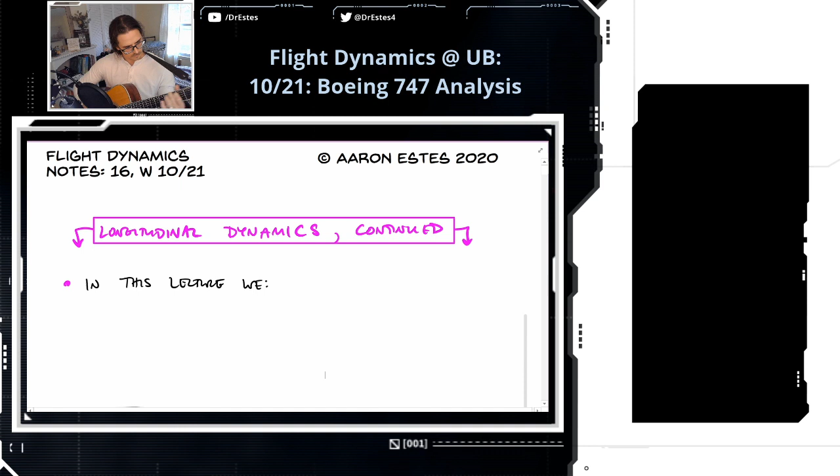Just what I needed to go with my lunch. Nice, this little thing I'm trying to learn how to play, it's from the game Chrono Cross, the sequel to Chrono Trigger. I think it's amazing how some of the most beautiful music is out of video games.

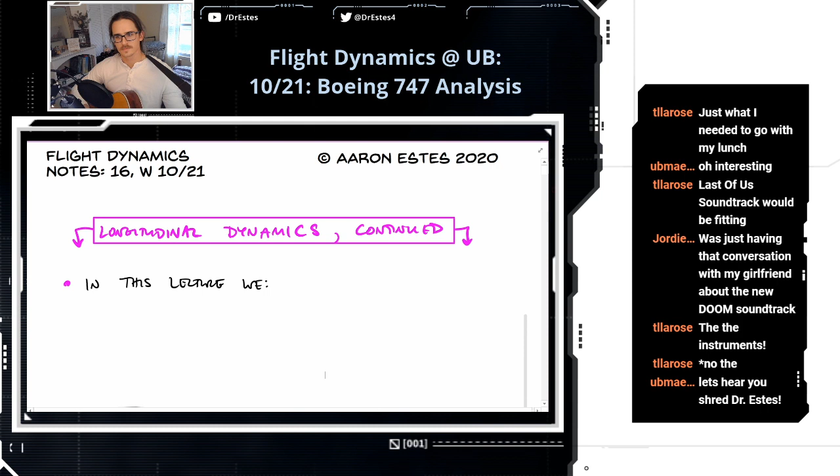Oh my goodness, am I a fan of Kirby? I'm familiar with Kirby, but I wouldn't say I'm a huge fan.

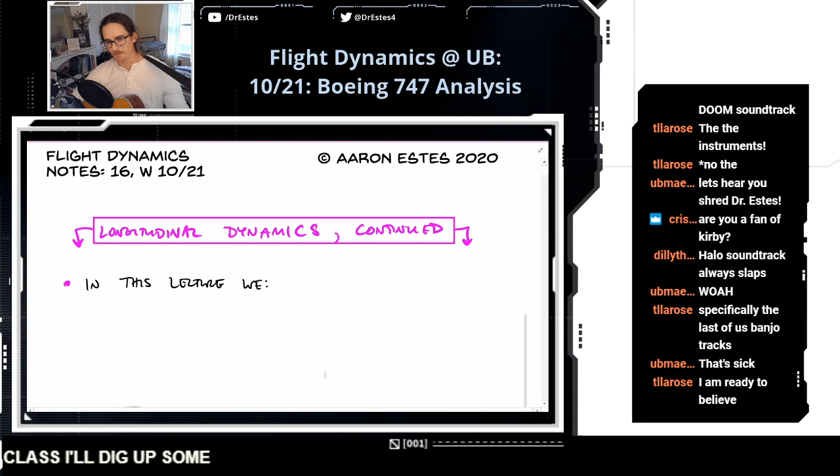Dude, I used to play a little death metal. If you remind me at the end of class, I'll play some for you. I'll bring up an old recording. You won't believe it. You'll be like, dude, I didn't know you shredded so hard. Oh, that makes me want to listen to The Last of Us, I'm going to look that up after class. Thank you for letting me know about that. Any soundtrack with some banjo, I'm game. If you guys remind me at the end of class, I'll dig up some tracks from back in the day, from the depths of the pit. It's just gonna melt your face.

Oh, that's funny. My brother Nathan, he would do some of the vocals, so I would do vocals with Nathan. And if you're familiar with death metal, it's just like guttural growling. It's just gonna melt your face. Was that how I delivered it? Yeah, it's legal to melt the face. It's definitely okay.

Are you guys ready to get started? I think this will be kind of fun today because we're going to dig into the parameters for a 747. In the second example we do, that's what we're going to do.

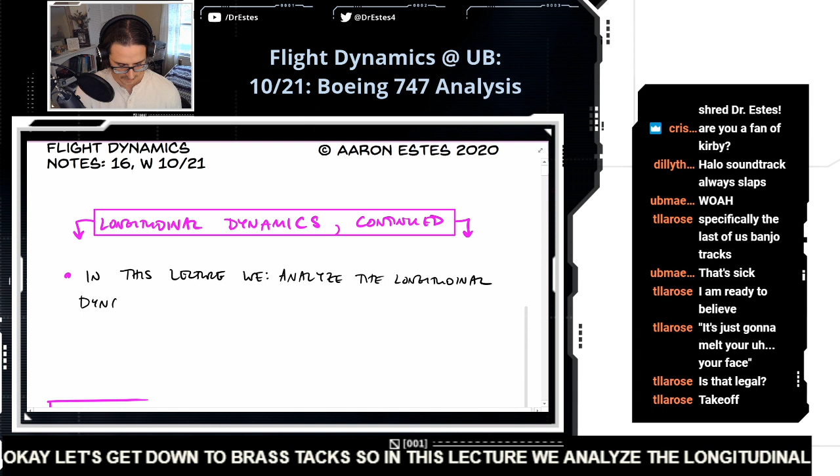Let's get down to brass tacks. So in this lecture, we analyze the longitudinal dynamics of some real aircraft. We're going to dig into some numbers. We will introduce the phugoid and short period mode. These are the two modes of longitudinal dynamics, and we'll introduce those a little bit, tell you what they are.

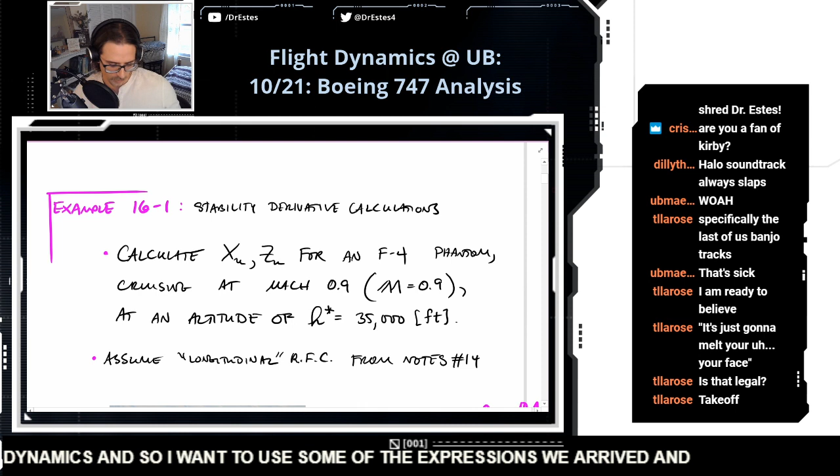So let's get into it. We're just going right into an example. Last class we talked about stability derivatives, specifically stability derivatives for longitudinal dynamics. So I want to use some of the expressions we derived and get stability derivatives for an F4 Phantom. We're going to get these two stability derivatives in this example.

This is an F4 Phantom right here. I think a lot of countries use this aircraft in their Air Force, it's not just limited to the States. I did a quick little Wikipedia scan and it was like, holy cow, a lot of people - this is a popular aircraft. So that's what we're looking at here.

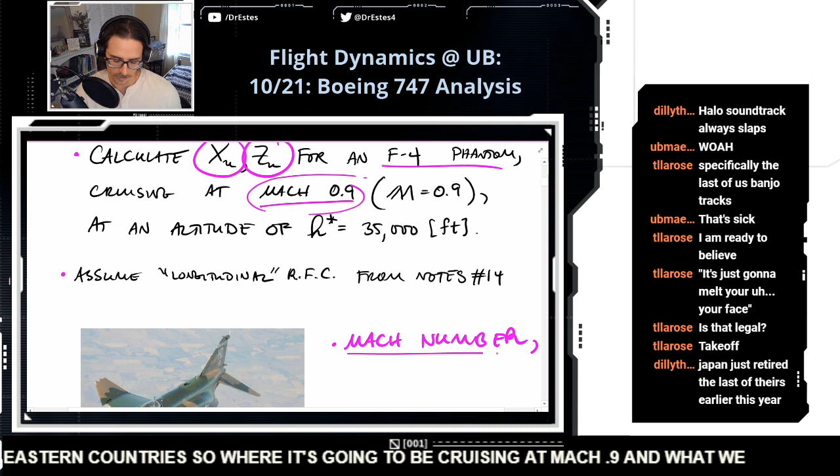Let's assume that it's cruising at Mach 0.9. Japan just retired the last of theirs earlier this year, okay cool, so maybe they're being phased out. But yeah, from the US, Japan, there were some Middle Eastern countries. So it's going to be cruising at Mach 0.9, and we haven't talked about the Mach number yet, so we'll introduce that. We're at a height of 35,000 feet, which is a pretty common cruising altitude.

Now, today we're going to be assuming the longitudinal reference flight condition, maybe like the standard. In this reference flight condition, the one we've been using the previous couple notes, it's just flying straight with constant velocity at some constant altitude. So the aircraft isn't turning or anything, it's just, boom, I'm going straight. That's the reference flight condition. So nothing too complex about that.

So what does it mean to be flying Mach 0.9? I'm going to use this scripty kind of M for the Mach number to distinguish it from the other capital M that we use, which is the pitching moment. So this is the way we'll tell them apart. But the Mach number is as simple as this: it's the velocity of the aircraft divided by the speed of sound. So if the Mach number is 1, that means that you are traveling at the speed of sound. We'll use lowercase a.

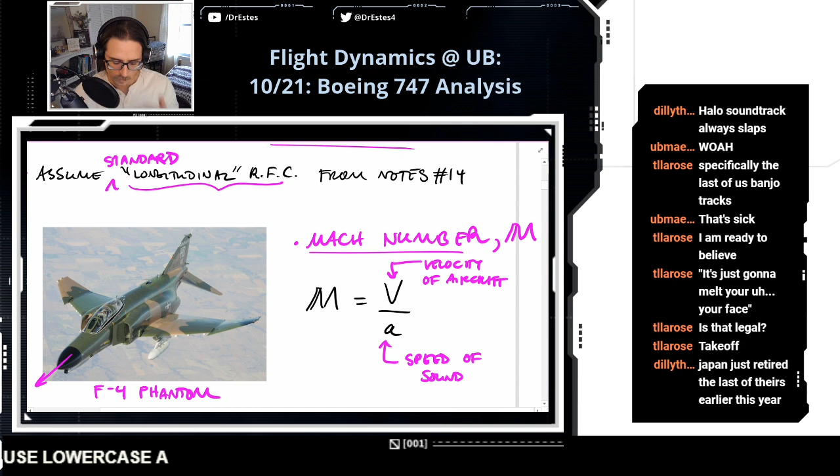Now, the speed of sound changes with altitude as well.

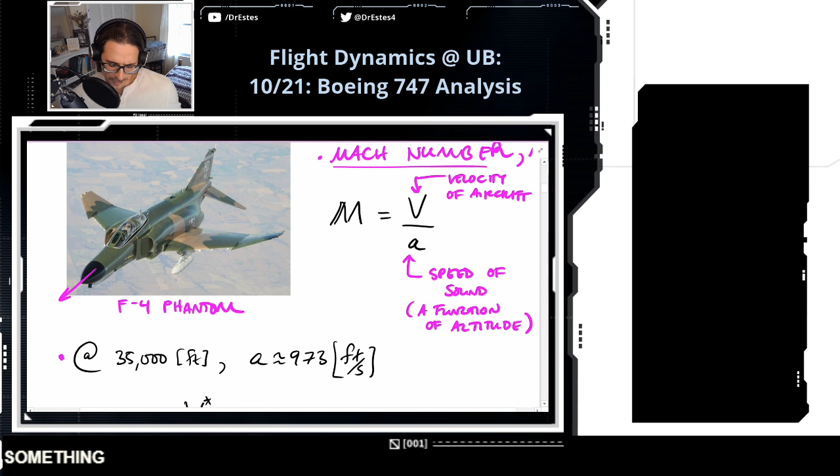Isn't there a Coldplay song about that? Something at the speed of sound. Get to the other side. I think that's exactly it, what I just said.

Okay, so at 35,000 feet, the speed of sound is... it rang a bell, yeah it probably sounds exactly like that if you pull up the album. So we're at 973 feet per second.

So our velocity, if we're going Mach, I already forgot what it was, Mach 0.9. We can solve for the velocity from this expression. It's going to be Mach number times the speed of sound, that's going to be 0.9 times 973 feet per second.

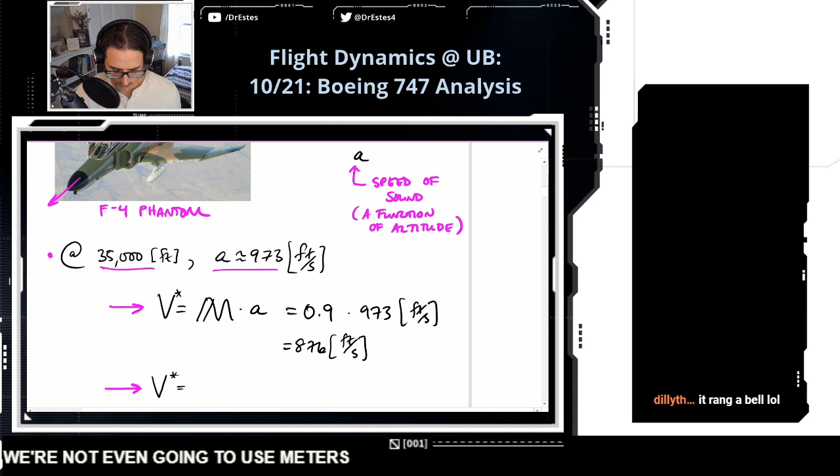We're using English units today, we're not even going to use meters. I think English units are pretty popular in aircraft dynamics, fortunately or unfortunately depending on how you look at it. I kind of wish everything was metric. Okay, so our velocity is 876 feet per second. Freedom units, that's right, we've got an election coming up, so we should just really ring the bell of freedom and use these English units.

At this flight condition, our side velocity is 0. We don't have any angle of attack, we're just flying totally level. So this velocity is all going to be in the U direction. In other words, we know that the body X basis vector points out the nose of the aircraft, so all the velocity is going to be in that direction, we don't have any side velocity. So U star, we're going to say it's 876 feet per second.

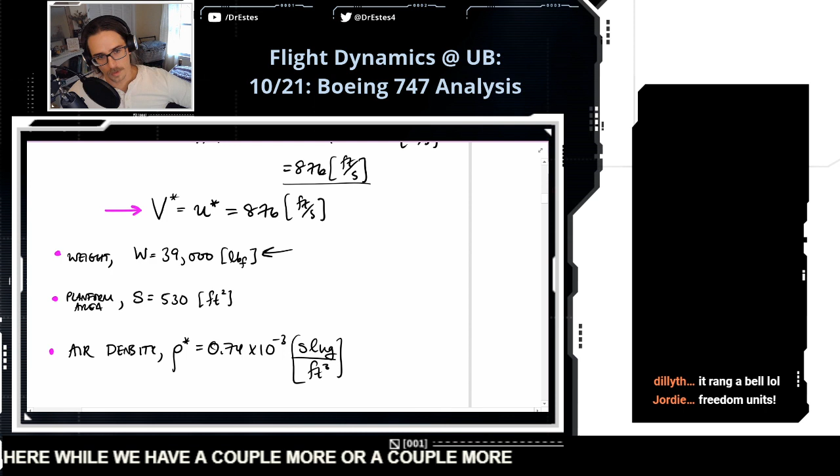Let's get the mass here. Well, we have a couple more parameters here. So this aircraft weighs 39,000 pounds. The planform area is 530 square feet.

Yes, alpha is going to be 0. And because we're at constant altitude, our angle of attack alpha is going to be 0. At constant altitude, this is also equal to our pitch angle, so we're going to be assuming both of these things.

Let's assume that. Okay, 530 feet squared, which, I don't know, I was looking at this and I was kind of surprised that the area projected here is 530 feet squared, but that's the correct figure, I double checked it. It just, I don't know, it almost seems like too much.

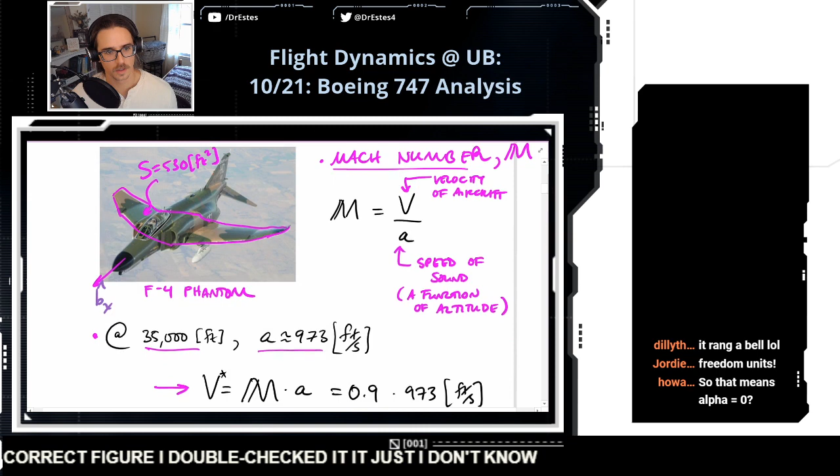And the air density at this altitude is 0.74 times 10 to the minus 3 slug per cubic foot. We're doing English units today, and we're going to take a second to talk about what a slug is. But we'll keep going. Well, look how tiny the person inside is for scale.

Let's see, oh actually that's a good point. I thought this whole thing was the person, but if you look really carefully, their head is just that, so they're pretty small in there. The later ones were two-seaters as well.

Schrechtenwald says, wait, doesn't alpha have to be greater than 0 to overcome the weight? Now, you're right, and I was thinking about this a little bit the other day, but this alpha equals 0 is just our... how do I say that? Well, okay, it's our linearization point. Actually, no, that's not a good argument either.

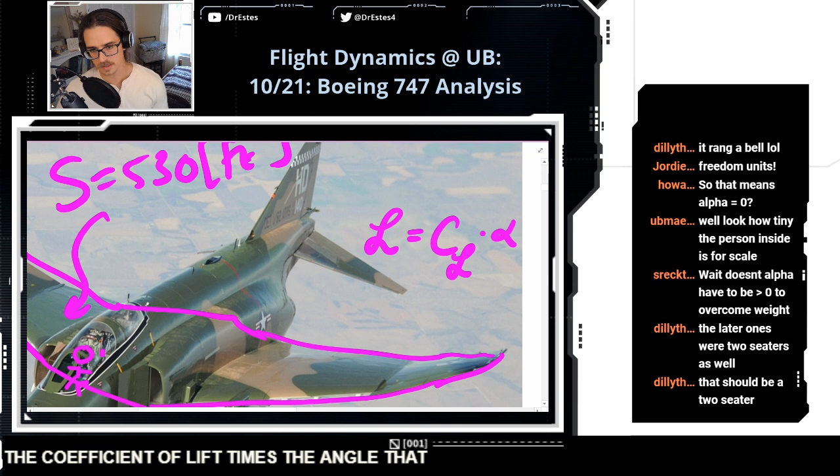I see what you're saying, because lift has to counteract the weight, and we can take the coefficient of lift times the angle of attack, that's like a standard linear representation of the lift force. And so you're saying if alpha is 0, don't some airfoils generate lift even at alpha equals 0? Non-symmetric and/or inclined airfoils.

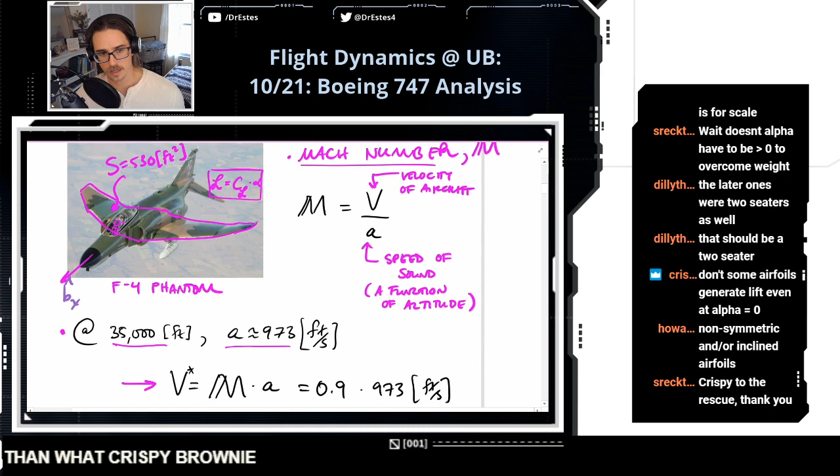Okay, so the purpose of this example is to calculate this stability derivative for this real aircraft, just to put some numbers to it. And last time we derived this expression, so let's put it to work.

This Q is the dynamic pressure, which is 1/2 times the air density times the velocity squared, but because we just have that longitudinal component, it's just U. All right, let's just plug in some numbers. 1/2, okay this is the air density, times 10 to the minus 3 slug per cubic foot, and then we're multiplying this by our velocity.

And if you multiply that all out, you get 283 slugs times 1 over feet times second squared. And we're going to come back to this in a second because I want to simplify this a little more.

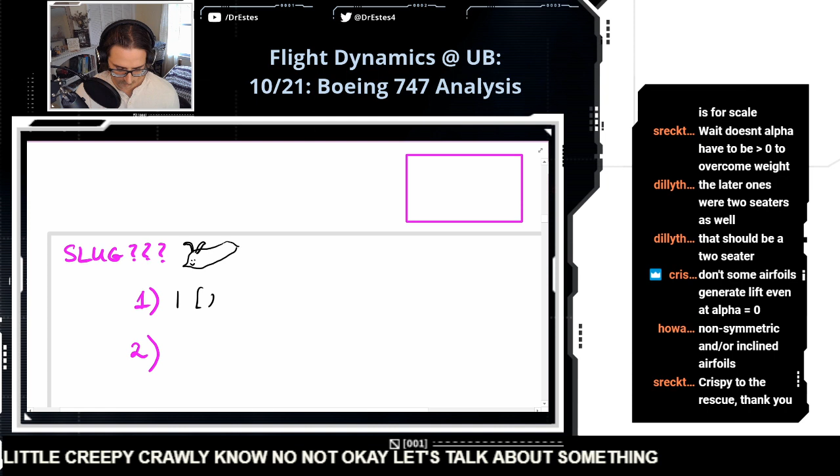Okay, let's talk about some English units here. 1 pound force is equal to 1 pound mass times 32.2 feet per second squared, which is gravitational acceleration in English units. I know we're used to 9.81 meters per second squared, but you could also do it in feet per second squared. Let's write another expression for the pound, but this one's going to involve slugs. It's equal to 1 slug times 1 foot per second squared.

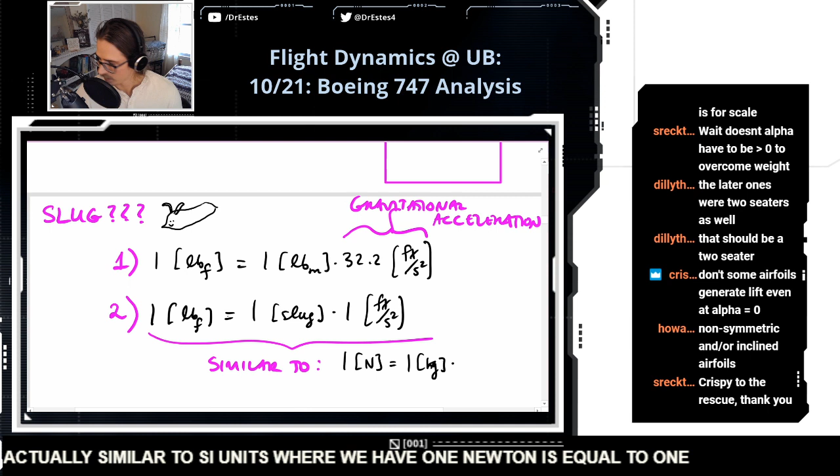So why do we even have the slug? I wanted to bracket this whole thing - this is actually similar to SI units, where 1 Newton is equal to 1 kilogram times 1 meter per second squared. So this pound force being equal to 1 slug times 1 foot per second squared is kind of analogous. Now, if you combine 1 and 2, this gives you the relationship between a slug and a pound mass.

So 1 slug is 32.2 pound mass. But what I want to use up above, if you take the second equation, you can say that 1 slug is 1 pound force divided by 1 foot per second squared. So let's use this up here.

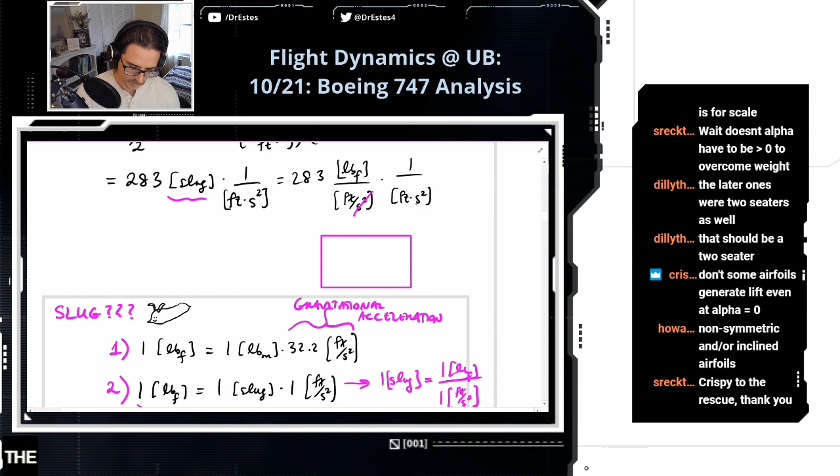So this is 283 pounds, and these second squares are going to cancel. So you're going to get 283 pounds per square foot.

Is psi in pound force? Wait, psi is the heading angle - or wait, sorry, I'm thinking of road vehicle dynamics. PSI? Oh, okay, gotcha. PSI should be pound force. Pound force, yeah, you're right. So many variables flying around. Okay.

Let's get the mass of this aircraft in slugs.

Interesting, I've been wrong all my life. Hey, but now you've seen the light. Wait, what did you think? Did you think it was - what units did you think it was in? Now I'm curious. Oh, pound mass. No, PSI, because pressure is a force over an area, so you got to do pound force. Okay. Watch, I'll be wrong. I don't think so.

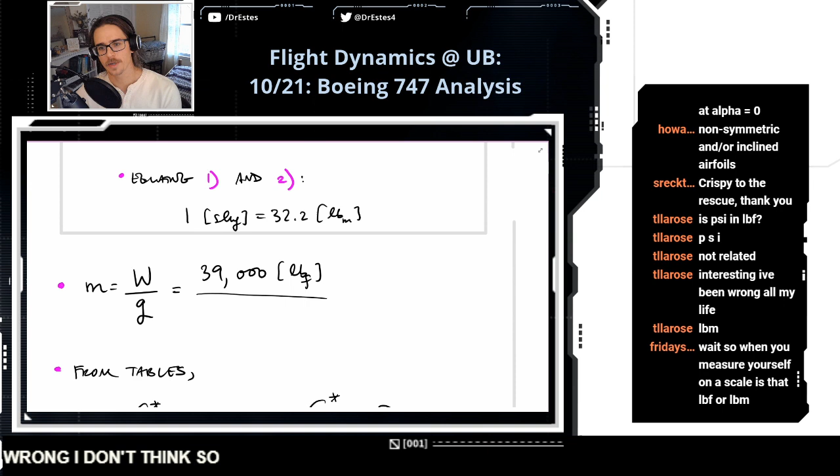Wait, so when you measure yourself on a scale, is that pound force or pound mass? That's pound force. I know it's tricky, but yeah, when you read on the scale, that's going to be giving you pound force, which is also equal to slugs. So you could say I weigh 180 slugs, because 1 pound force is 1 slug times foot per second squared. So I can lose weight by changing the units. Yes, you can. It's the easiest way to lose weight.

Okay, we got to divide by 32.2 feet per second squared, and this is going to give us 1,200 slugs.

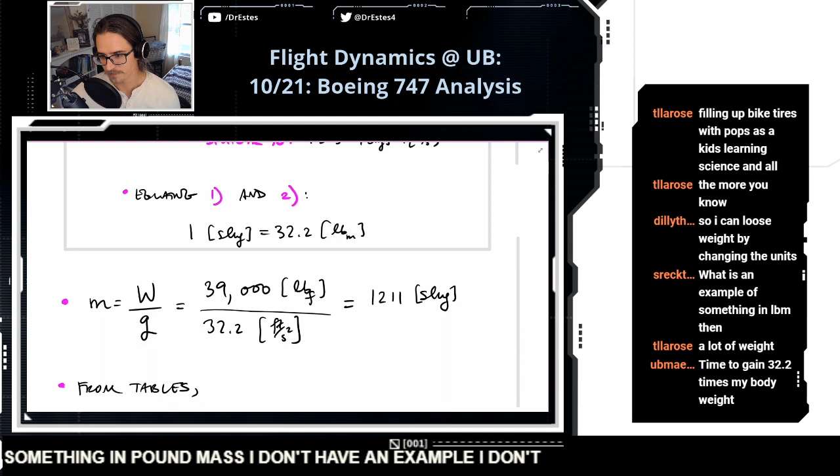Okay, so let's get back to this stability derivative here. We have this expression. Now these coefficients, the coefficient of drag and the partial derivative of drag with respect to your airspeed, these you find in tables. So eventually for flight dynamics, a lot of stuff is tabulated and we're just going to be looking stuff up. In fact, that's what we're going to do with the Boeing in the next example.

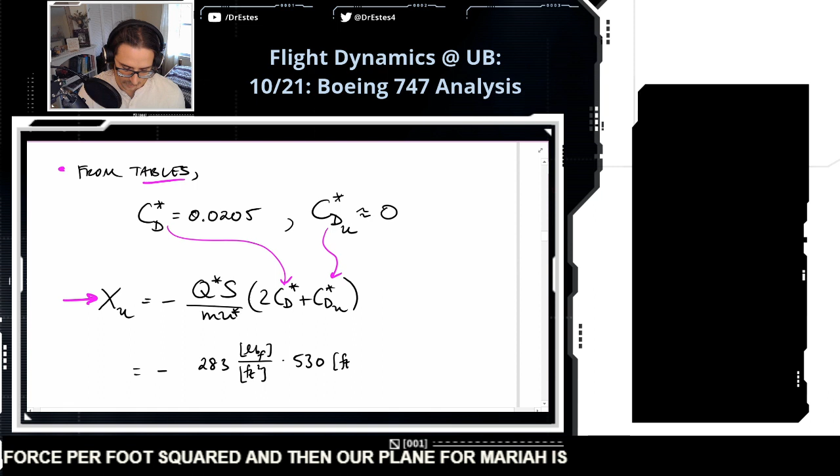Okay, so let's just plug some stuff in. 283 - so I'm putting in the dynamic pressure, pound force per foot squared. And then our planform area is 530 square feet. We're going to divide by our mass, which was 1,200 slugs. And then we're multiplying that by our velocity, 876 feet per second. And then we're multiplying by these coefficients over here, so that's just going to be 2 times our coefficient of drag.

And if you multiply all this out, you get minus 0.0058 1 over slug pound force.

And I wonder where the name slug came from.

Okay, this pound force over foot per second. This is slug times seconds to the minus 1. So that would allow me to cancel this slug here. Cancel out that slug. And then we're going to have seconds to the minus 1.

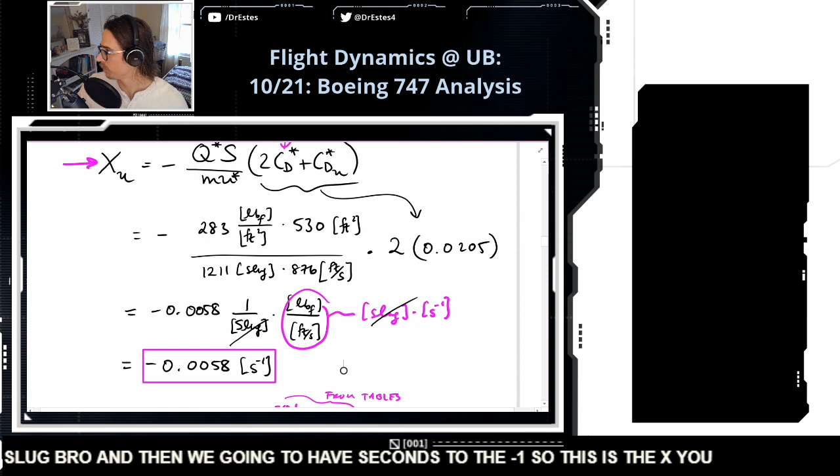So this is the XU stability derivative for an F4 Phantom, in case you were ever curious.

Now this other stability derivative that we wanted to get, Z sub U, this expression we didn't derive directly, but you can also find this expression in a table. This is from the Nelson textbook, and I think I put a portion of this table in our last set of notes. But this stability derivative works out the same way, you just plug in everything. And we would get minus 0.0283 seconds to the minus 1.

I was trying to fly one the other day, but the XU light kept coming on. I think you're making that up. Okay.

Guys, let's talk about a Boeing.

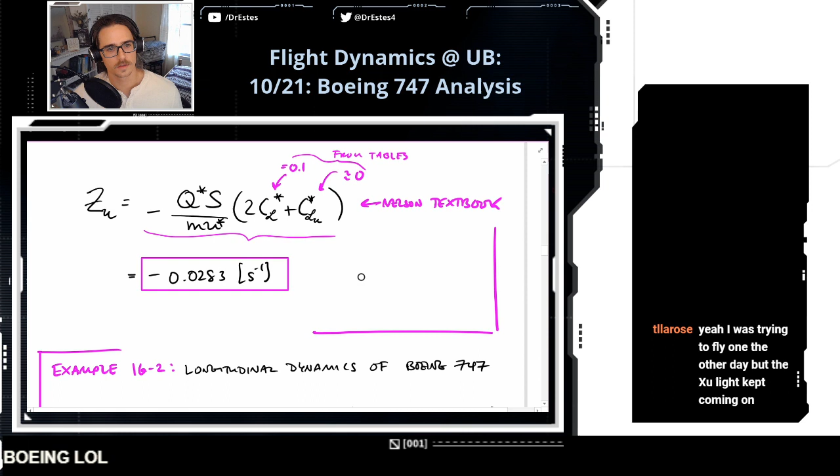And just a reminder, where do these stability derivatives go? Like, what's the point? If I have this number, what do I do with it? I'm going to scroll ahead a little bit here because I want to remind you of something.

We have these longitudinal perturbation dynamics that we derived. So this state space model describes the dynamics of an aircraft about this level longitudinal flying condition, and you see the stability derivatives get plugged into this matrix. And that's going to affect the dynamics. We're going to dissect that in detail for the 747. But if you're wondering, okay, we got this number, what do I do with it? Well, you're going to plug it into this matrix and then proceed from there.

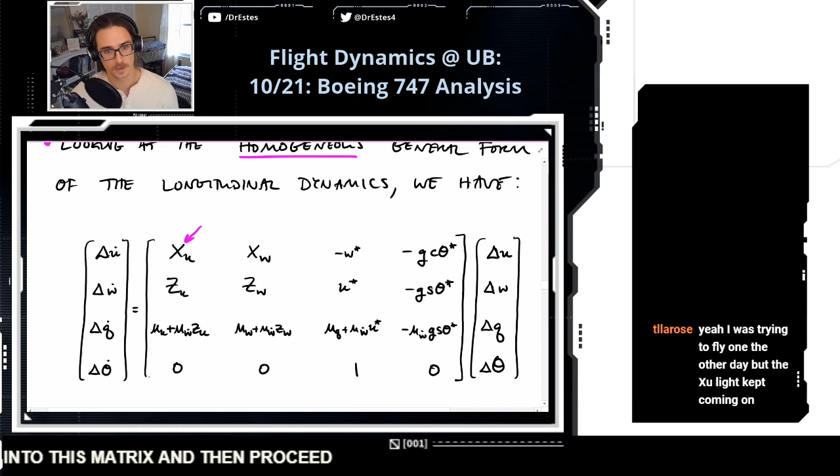Okay, so let's get into the 747. So this is the condition we're looking at. The standard longitudinal reference flight condition, just going straight, cruising at 40,000 feet, Mach 0.8. So we're going to keep practicing the Mach number to get used to it.

Another word for slug is a G-pound. What? Oh, I guess that makes sense because it's a pound multiplied by G, 32.2, right? Okay, that makes sense. A G-pound. You take a pound mass multiplied by G, and that creates a slug.

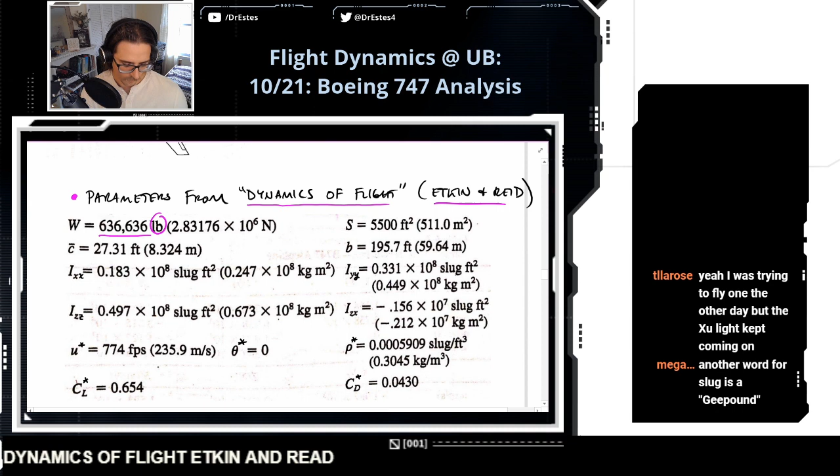This is kind of interesting. Look how heavy that thing is. This is pound force, by the way. I took this from a textbook called Dynamics of Flight, Etkin and Reid, and that's where I found it.

Now this is a much larger aircraft. Look at this planform area, 5,500 square feet. So that's 10 times the wing area of the F4 that we were looking at. You have the wingspan here, so almost 200 feet tip to tip. The mean chord, 27 feet.

Wait a second here. So this is the chord, and you see the chord is different. It's thicker towards the fuselage. But this is saying that the mean, if you average the chord from tip to tip, on average it's 27 feet. That almost seems too much. But I guess it tapers a lot towards the end, and that's a lot. Okay.

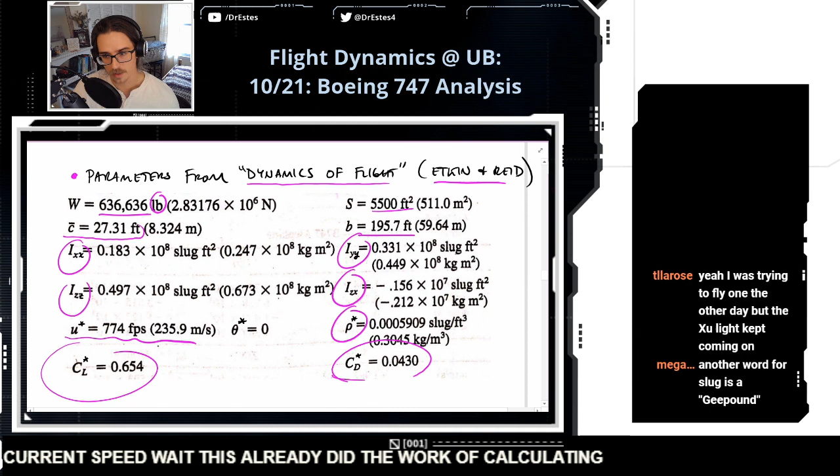So we have inertia properties. We have the air density at 40,000 feet, and we have the coefficient of drag at our current operating conditions. So that depends on your current speed. Wait, this already did the work of calculating our speed from the Mach number at altitude. Okay.

And this is also assuming that the pitch angle is 0. So because we're going at constant altitude, this also means that the angle of attack is 0 once again.

So we're going to need to use these parameters to calculate stability derivatives to populate this matrix. So this matrix, I've been calling it A sub L for longitudinal dynamics. And then these are our perturbation state derivatives. So I call it delta X dot sub L. And this is just delta X sub L.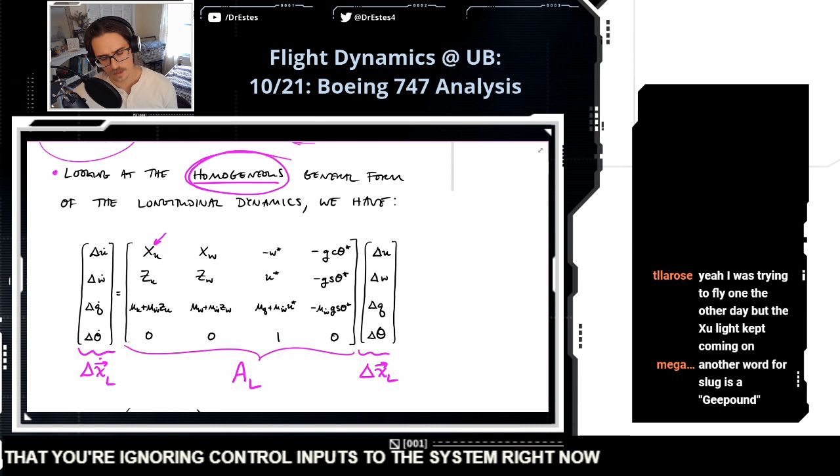So I'm looking, homogeneous means that you're ignoring control inputs to the system right now. In other words, I just want to look at the A matrix, because this is what determines the stability, the transient dynamics of the aircraft. So we're going to derive this matrix today and take a look-see at what it means.

Now, okay, this is going to give us a head start on getting the stability derivatives. This table gives the dimensional derivatives for a 747. A dimensional derivative is not a stability derivative, but it's close.

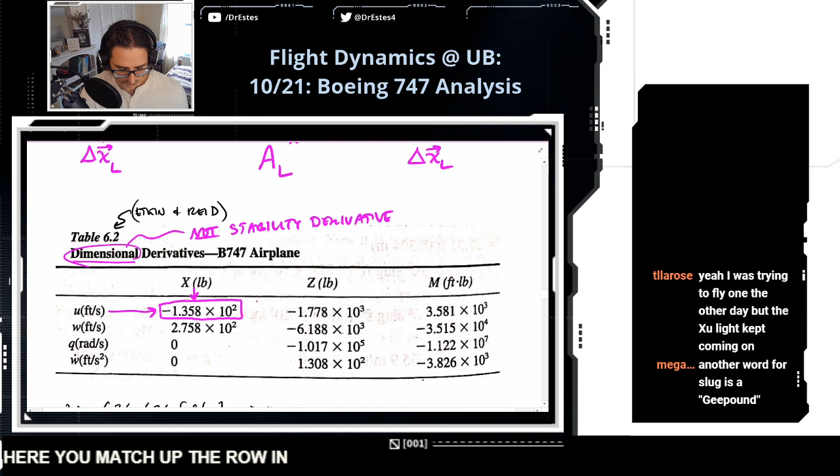So how do you read this table? Let's look at this element right here. You match up the row and the column. This is the partial of x with respect to u, airspeed or velocity, evaluated at our reference flight condition. This table, the numbers would change depending on your Mach number, depending on your altitude. But these dimensional derivatives, these are literally just the partials. So like this element down here, it's dm dw dot, evaluated at the reference flight condition specified above.

So this is just going to give us a head start. These are very close to what the stability derivatives are. Okay, so we'll get to this.

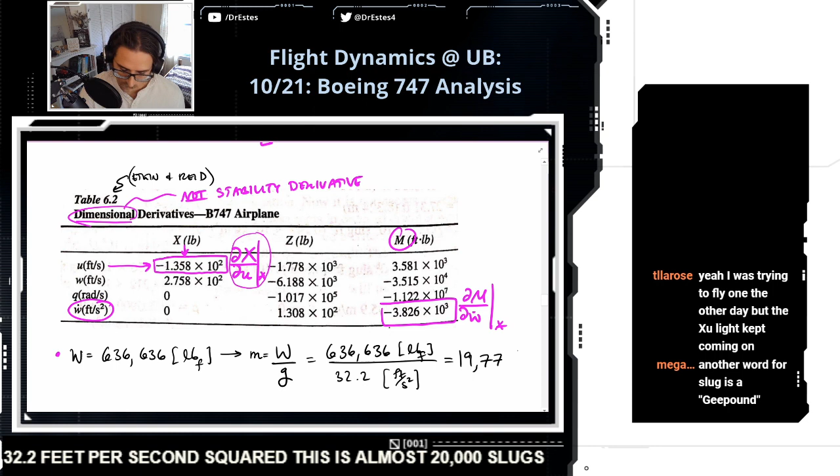Let us calculate the mass of a Boeing 747 in slugs or G-pounds. 32.2 feet per second squared. This is almost 20,000 slugs. 19,771 slug.

Okay, here we go. So, okay, let's get our first stability derivative here.

So the stability derivative x sub u, we can use the expression up here. However, more generally, x sub u is equal to 1 over m times the partial of x with respect to u evaluated at the reference flight condition. Because we're given these partials already in the table, all I need to do is take that number from the table, divide it by the mass, and then I'll get the stability derivative. So in this case, I don't need to use this other more detailed expression. Let's go back down here.

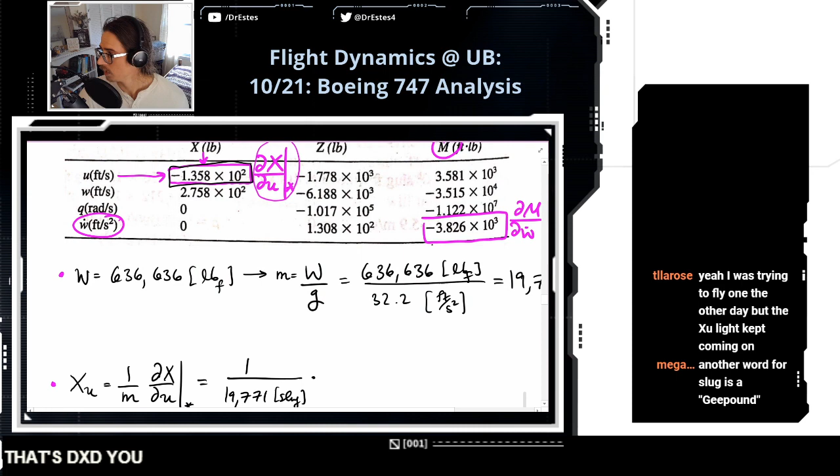So xu, it's going to be 1 over m, dx du, evaluated at the reference flight condition. So I have the mass, 19,771 slug. And then I multiply it by this entry up here in the table. So that's dx du. What is that? It's multiplied by 10 squared, so that's minus 135.8 pounds, pound force, divided by feet per second. And this simplifies to minus 0.006868 seconds to the minus 1.

And we're going to do a couple of these. Remember, the goal is to populate everything in this matrix. And so we got to calculate quite a few of these stability derivatives. But it's worth it to figure out how the heck a Boeing works.

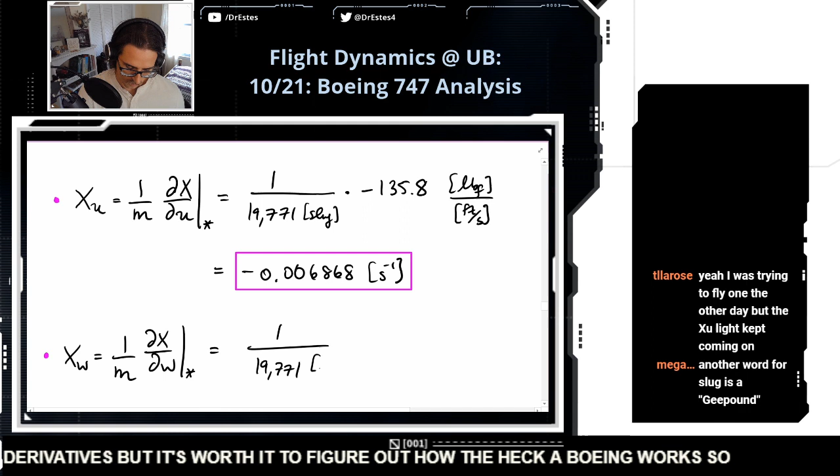So, all of these are going to be the same with that. Divide by slugs. And then I need to multiply by this partial. So dx dw, it's positive 275.8. If you multiply that out, 0.01395 seconds to the minus 1.

What's this next one? Okay, this one I'm just going to give you the number for because it's calculated this way. It looks very similar to the above two stability derivatives. It's just with respect to z. So this is minus 0.08993 seconds to the minus 1.

ZW. Let's get this stability derivative. Minus 0.3130 seconds minus 1.

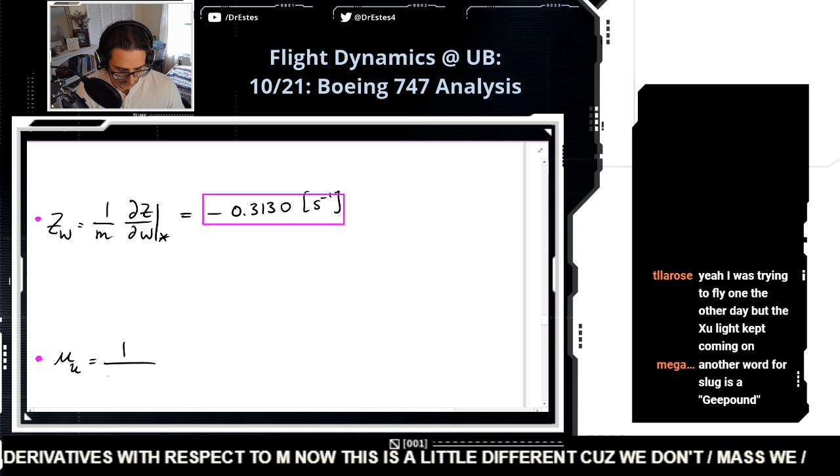Now we're going to get into the pitching moment stability derivatives, so stability derivatives with respect to m. Now this is a little different because we don't divide by mass. We divide by the inertia about the y-axis. But we still take the partial with respect to u, evaluate it at the reference flight condition. And this, let's just give the number.

Because you do this the same way, you go back up to the table, you find the inertia. Wait, actually, let's write this one out, because the inertia is massive. It's kind of interesting to see: 0.331 times 10 to the 8th slug times feet squared. It's interesting that this is just such a massive structure. And yep, it flies. It flies.

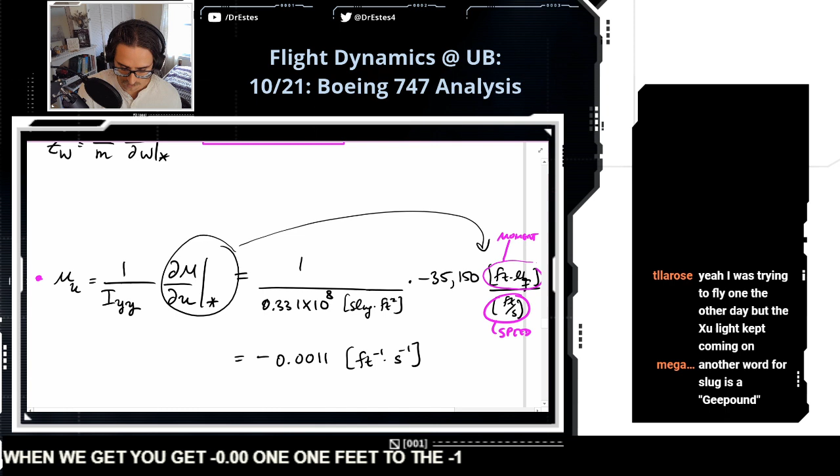Okay, negative 35,150. So this is the dimensional derivative, and it's foot-pounds divided by feet per second. So like the pitching moment, this is the unit for a moment, right? A force acting over a distance, pound force acting over a foot, and then we're differentiating it with respect to a speed. So that's why it's divided by feet per second. So when you multiply this out, what do we get? You get minus 0.0011 feet to the minus 1 times second to the minus 1. And you can figure out these units by converting slug in terms of pound force and square feet, and then you can cancel things out, and it just turns out to be this way.

MW. So that's the same inertia. Now it's the partial with respect to W. I'm just going to give you the number for this one. Oh wait, I did the wrong number for the last one. The number for this one is supposed to be minus 0.0011. We're gonna have to change the one right up above here though, because I gave you the wrong number. This number up here is actually smaller, and it's a positive number: 1.082 times 10 to the minus 4.

Okay, we have two more stability derivatives to calculate, and then we get to start combining things and building this matrix to do some interesting analysis. So, m sub q, 1 over this inertia times dm dq, evaluated at the reference flight condition.

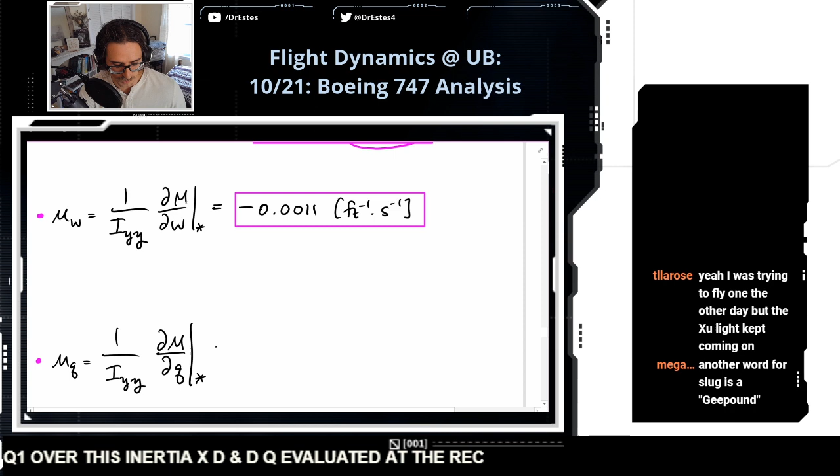If the partial is negative, how is mu positive? Did I miss something? Oh, you guys, you know what I did? Because I stole this thing from this one, and I also stole this thing from this one. I'm glad you mentioned that, because this number is wrong. Sorry. That's supposed to be 3,581. When you do the math for this one, that's when you have the minus 35,000. Thanks for pointing that out.

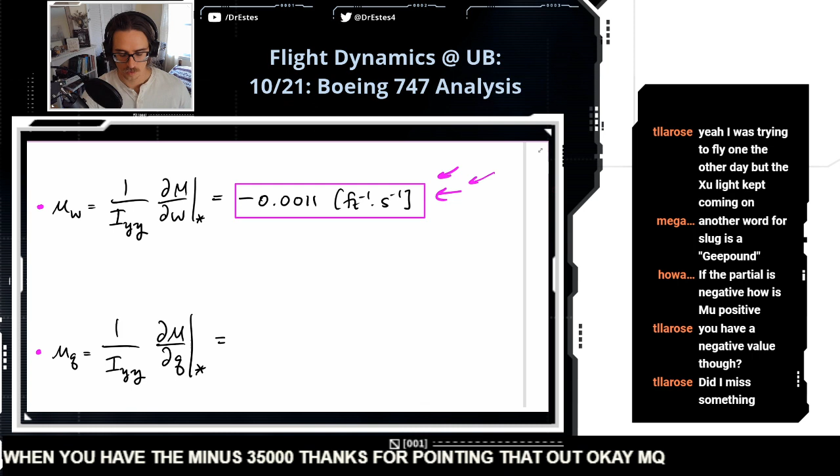Okay. MQ, minus 0.339. This one's just in units of seconds to the minus 1.

And then we got our last one. M with respect to W dot. 1 over IYY, dm dw dot, at the reference flight condition. This is going to be minus 1.1560 times 10 to the minus 4th, feet to the minus 1.

All right, so those are all of the stability derivatives we need to fill in the matrix up above. Let's go to that matrix real quick. And you're going to see for this third row, you need some combinations of stability derivatives. So we're just going to fill those in right here real quick. If you multiply this stuff out, so these are all quantities from that third row.

So this is 1.186 feet to the minus 1, second minus 1. This one is minus 0.00106, also feet minus 1, second minus 1. And then this last one is minus 0.4285, and that's just seconds minus 1.

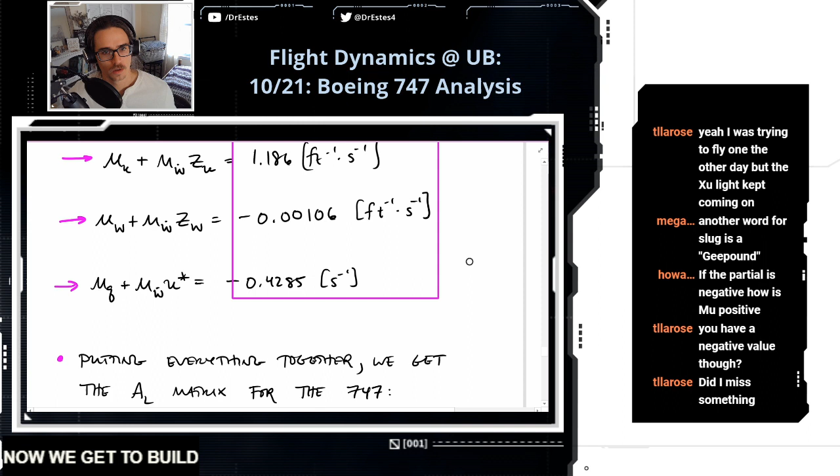And now we get to build the matrix. And I just filled in the numbers here. So this is the longitudinal system matrix for a Boeing 747.

Now, the first thing you do to analyze this system is you calculate the eigenvalues of this matrix. Let's do it in MATLAB.

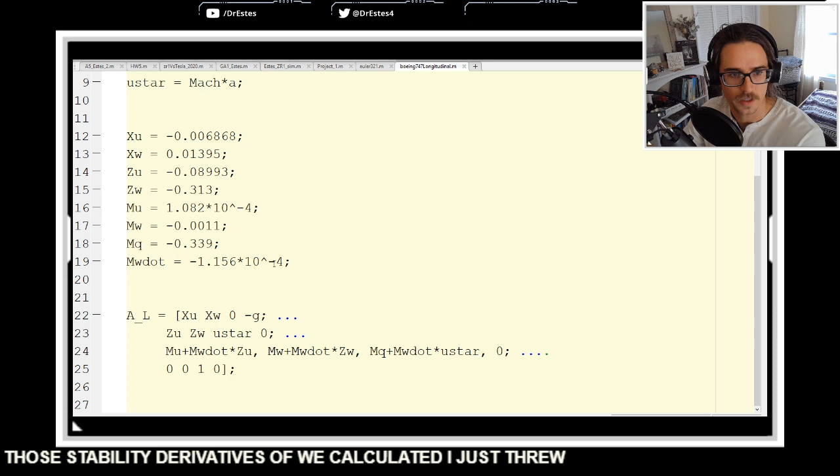So I made a little code here. The weight. Okay, we get the mass. I have the speed. And then I have all of those stability derivatives that we calculated. I just threw them in here. And then I built my A matrix. So I'm going to run this.

Wait, let's bring this over a little bit. Let's not show so many decimals either. Yeah, that makes it a little easier to look at. Okay, so in MATLAB, you guys all know, to calculate the eigenvalues, you just use the eig command. And boom, this is what we get.

And I want to spend the rest of the class talking about these eigenvalues because they're important and they tell you a lot about what the aircraft actually does. Let's go back here. We got the eigenvalues. I'll call these alpha 1, 2, and wait, this is a lambda. Lambda 1, 2, and lambda 3, 4.

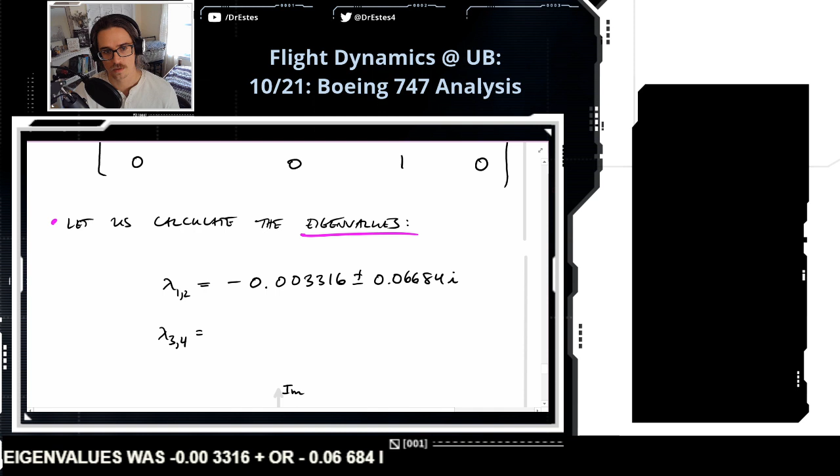So one pair of eigenvalues was minus 0.003316 plus or minus 0.06684 i. Then the other pair was minus 0.3709 plus or minus 0.9039 i.

And what I want to do to visualize these a little bit is draw them in the complex plane. And we won't draw this exactly to scale because these numbers are really vastly different from each other. But let's draw lambda 1 and 2 first. So it has a very small negative real part. And it also has a small imaginary part. And I'm going to draw this pair, close to the origin, that's the idea you want to get.

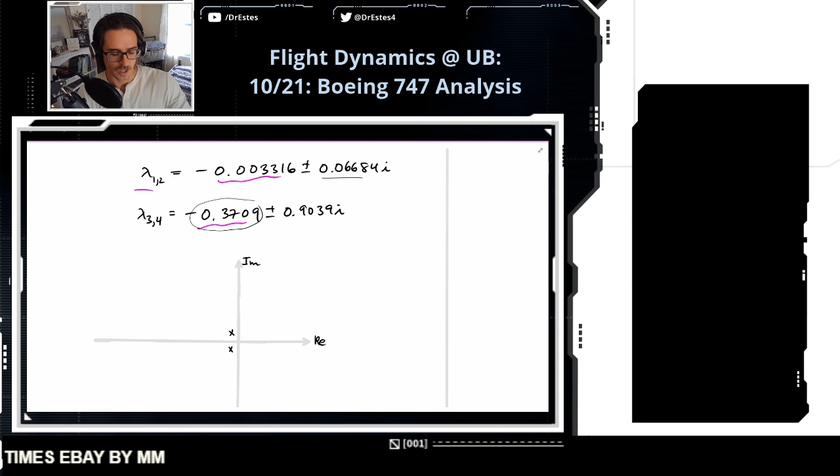This other pair of roots, the real part is what? Is that 100 times the magnitude of the real part? I'm bad at that kind of math in my head. Or is it 1,000 times? I think it's like 1,000. I don't know, I'm embarrassing myself. Okay, and then the imaginary part here is also like 10 times bigger. 2 orders of magnitude, right? And this is like 1 order of magnitude bigger. So lambda 3 and 4, this isn't exactly to scale, but those other roots are like out here. So let's put lambda 1 and 2.

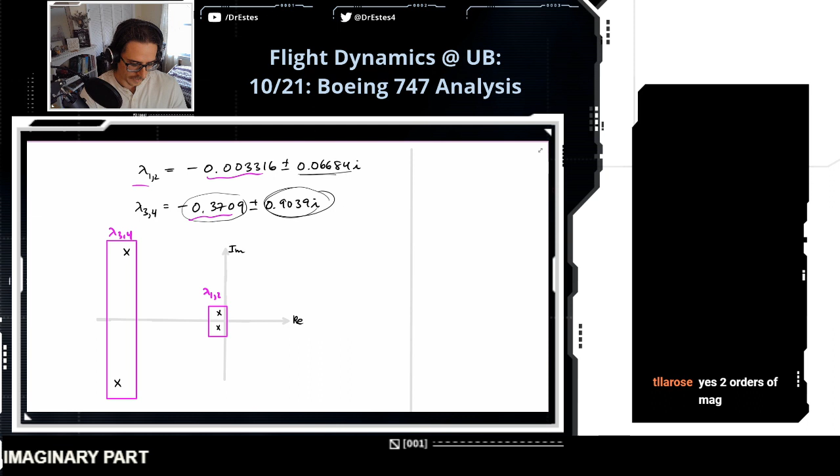Now if you take any standard fixed wing aircraft and calculate the longitudinal dynamics like we did for the 747, or like if we did this for the F4, you tend to find roots that look like this pattern. You get one pair of roots really close to the origin, imaginary, and then another pair of imaginary roots farther in the left half plane with a higher magnitude imaginary part. That's why we give these special names. The one close to the origin we call the phugoid mode, and the other one, way out here, we call the short period mode.

Always negative for both in the real part... well, I don't want to give it away yet because we'll analyze these. Short answer is some aircraft on their own are naturally unstable, meaning they want to basically crash into the ground if left to their own devices. But then we add a control system to that aircraft that stabilizes it. So after an aircraft has a control system, I think it'll always look something like this, even if it might naturally be unstable. So I'll say always negative for both in the real part.

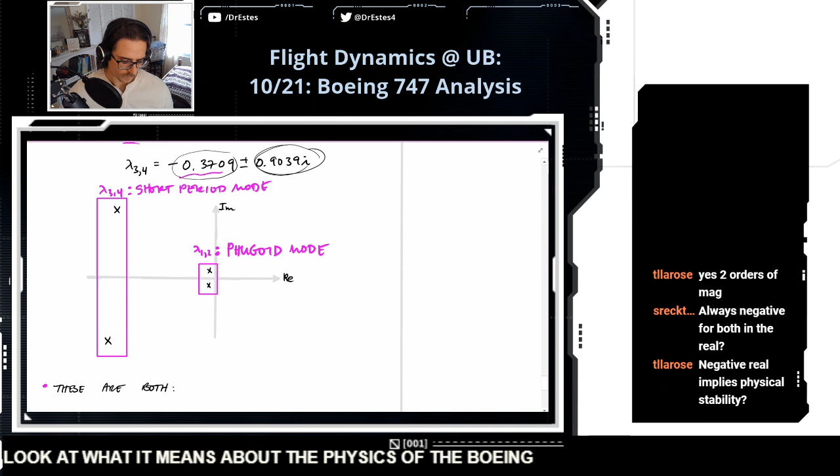So these pairs of roots are both complex conjugate roots. All that means is it has a real part and an imaginary part, and complex conjugate roots always come in pairs symmetrical about the real axis. So these are always the same distance from the real axis, like a mirror image. They're both complex conjugate roots, and we're going to get into that because you get a lot of information from that.

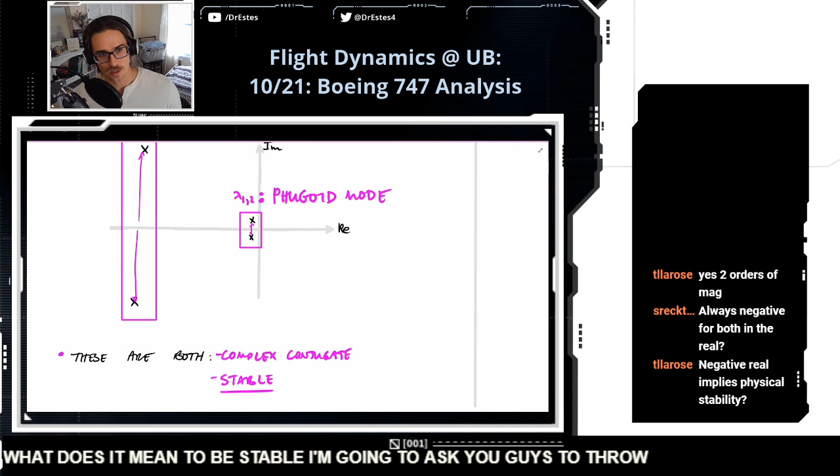Stable - what does it mean to be stable? I'm going to ask you guys to throw that in the chat. And when you put your answer, it has to be correct - I'll pick it apart if it's not perfect.

Okay, negative real implies physical... oh wait, did you already say that? I'm rereading a comment from earlier.

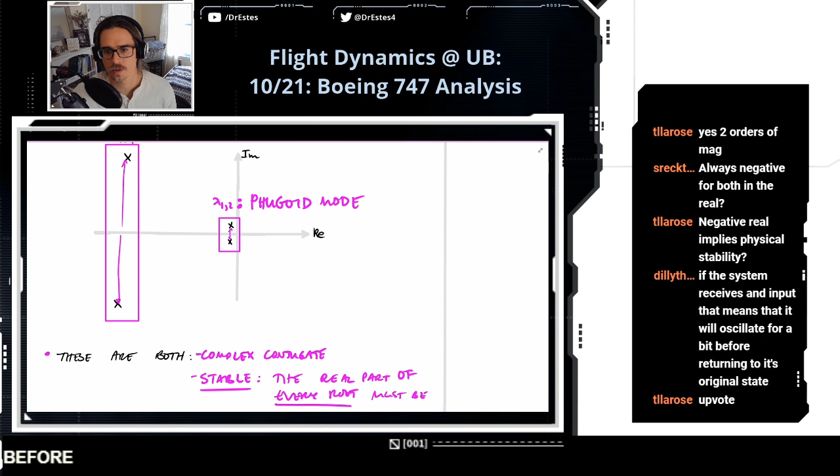What does it mean to be stable? Let me think how to say this - the real part of every root must be negative. Dilly says, if the system receives an input, that means it will oscillate for a bit before returning to its original state. Good, that's good - that's an intuitive physical explanation, and that's what an aircraft will do. The real part of every root must be negative - that's what you're looking for when you look at these roots in terms of stability. So as long as they exist in what we call the left half plane, they're stable.

Okay, now let's get into analyzing the properties of these second order roots. So I'm going to write a generic second order form here. Let's take out lambda 1 and 2.

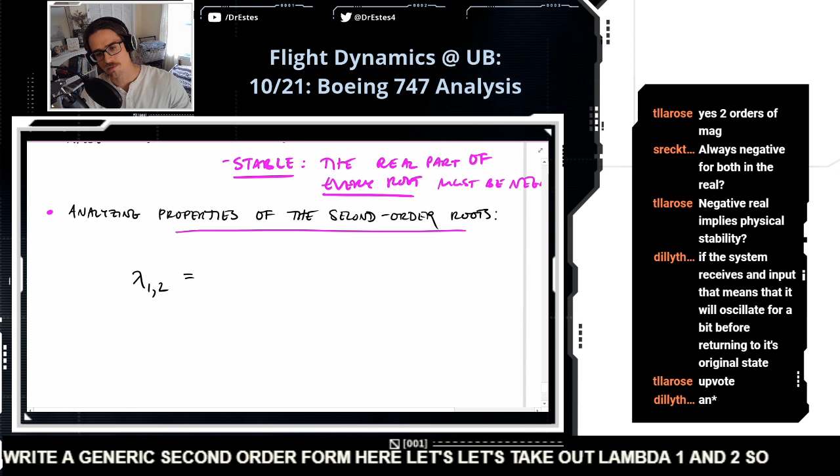Whenever you have complex conjugate roots like the ones we have, we can write them in terms of these variables, which I'm sure you recognize from taking our dynamic systems course. I need my imaginary variable over here. So: zeta, the damping ratio; omega n, the natural frequency; and omega d, the damped natural frequency.

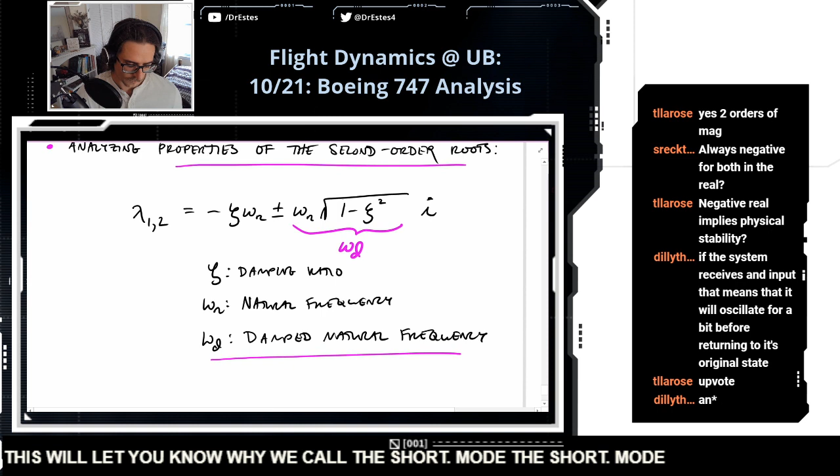I want to look at a couple of these things, comparing the short period to the phugoid modes. And what I want to look at first is the damped natural frequency, and this will let you know why we call the short period mode the short period mode. The units for the frequencies here are in radians per second, by the way, but a common unit for frequency is hertz, or cycles per second. So okay, let's compare.

Let's compare our roots - I'm going to bring these numbers back down here, copy them, and then paste them. So from right here, this one is the phugoid mode. Let's call it omega d, ph for phugoid. It's 0.06684 radians per second. Now let's convert this into cycles per second - there's 2 pi radians in one cycle, and then the radians would cancel and we'd have cycles per second. So we're going to divide this by 2 pi, and I'm going to do that in MATLAB right now.

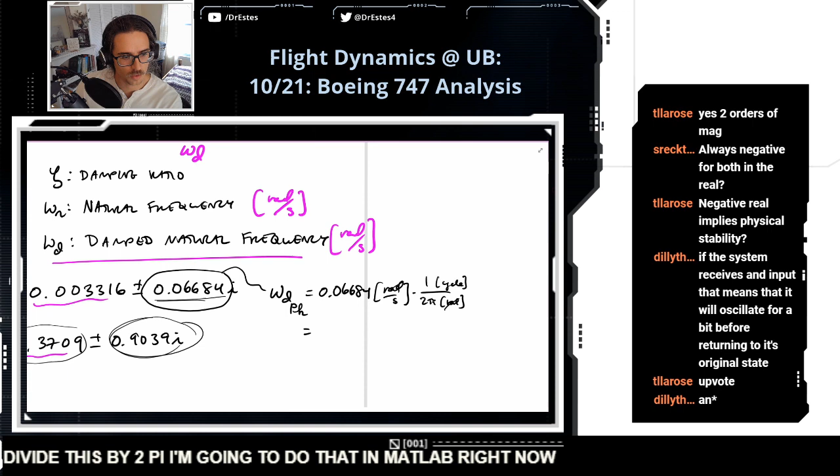0.06684 divided by 2 pi gives 0.01 hertz, cycles per second. Let's call this the damped frequency for the phugoid. Now, the period of oscillation is how long it takes to complete one cycle. So for the phugoid, I take 1 divided by that frequency, and it's 94 seconds.

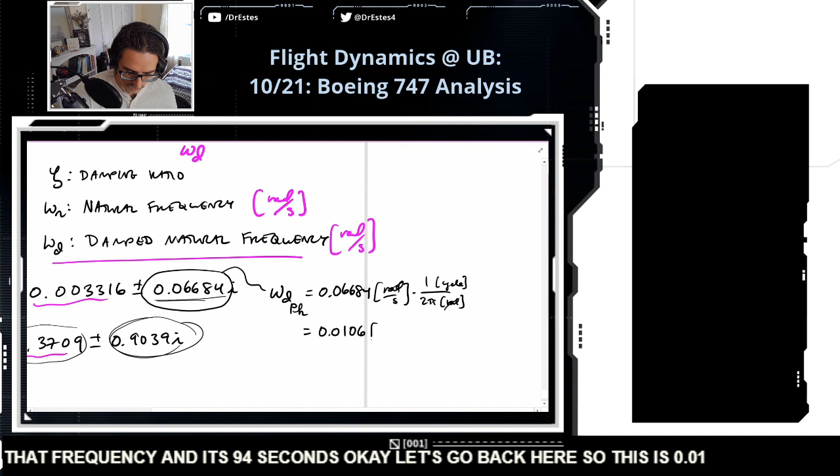Okay, let's go back here. So this is 0.0106 hertz, which is approximately 1/100th of a cycle per second. So then the period of oscillation for the phugoid is 94 seconds.

I think Dilly mentioned earlier, imagine a system receiving an input and it will oscillate for a while before returning to its original state. If you have a Boeing up in the sky and you hit it with a gust of wind, you're going to excite its short period and phugoid modes, and it's going to take 94 seconds.

We'll be able to talk later about what the phugoid actually looks like, but in terms of the motion, it's kind of something like this. The aircraft does this. So if you hit a Boeing with a gust of wind, it's going to do a motion like this, and it takes 94 seconds to complete a full cycle. So it's a big, slow, kind of moving mode.

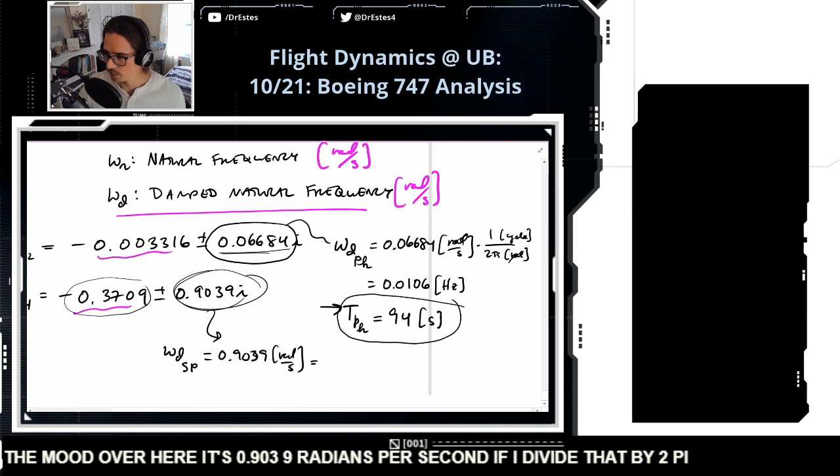Okay, let's do the same thing with the short period. Let's just call it SP. I'm going to run out of room, so I'll move it over here. It's 0.9039 radians per second. And if I divide that by 2 pi, let's calculate this. 9039. So that's the frequency in hertz.

So the damped frequency for the short period is that. And then the period, how long it takes to complete an oscillation, is 1 divided by that. What is that? 7 seconds. So the period of oscillation of this mode is much shorter, 7 seconds compared to close to 100 seconds.

Okay, so this was 0.14 hertz. Let's just leave it at that. So then the period of oscillation for the short period was 6.95 seconds. And this is where the term short period comes from.

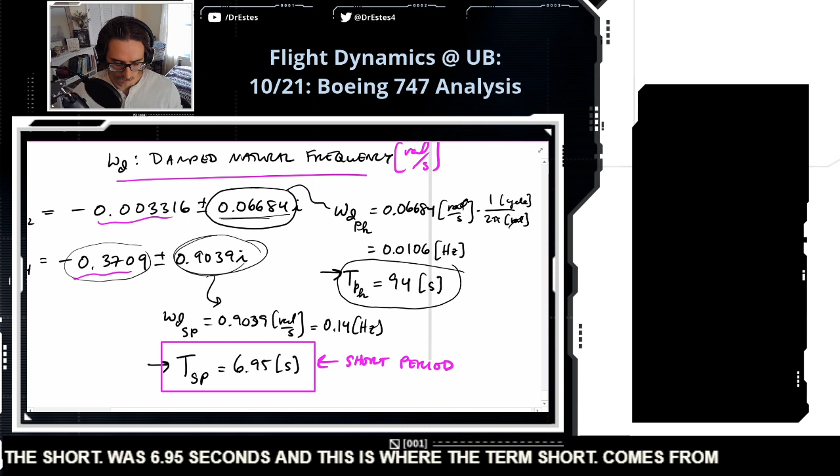Now, another thing Dilly mentioned about stability is that if you perturb a system, there's a certain amount of time for it to come back to its original state if it's stable. A measure of that, a measure of system speed, actually, I want you to guess. What do you think I'm going to use to measure the system speed for both of these modes, how quickly they return to an original state?

Settling time, yes. Oh, that's not a bad idea to do the ratio of the periods, but that's not exactly what I'm talking about here. The settling time. So,

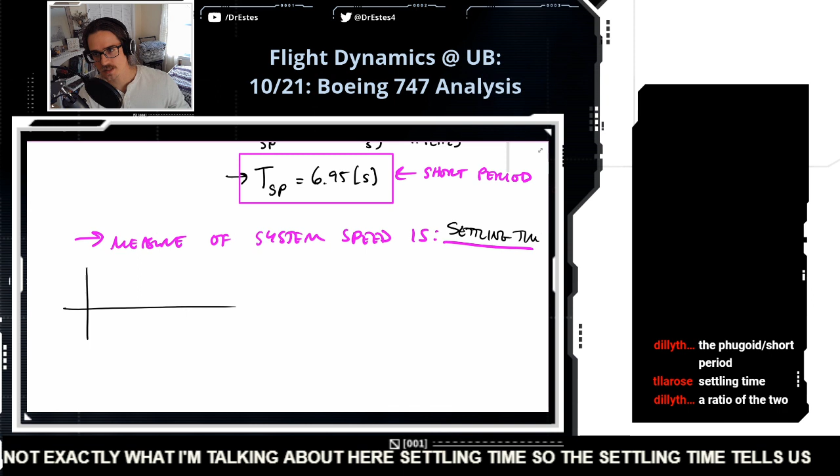the settling time tells us, let's say I perturb the Boeing from its original state. Maybe I'll plot the pitch angle here, or to be more precise, a perturbation of the pitch angle. Let's say I have a gust of wind and it pitches the nose up a little bit. It's going to oscillate like this, but it's eventually going to go back, approaching exponentially the original state.

And the settling time quantifies how long it takes for this envelope to decay 98% from where it started. So a 98% reduction.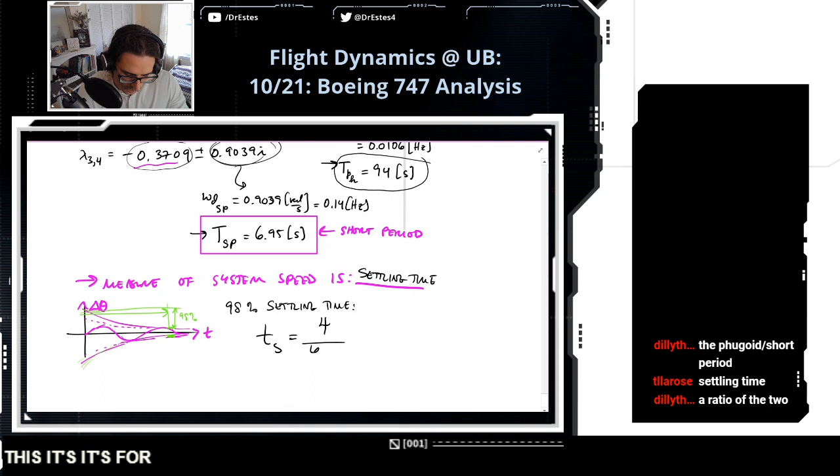Now, the settling time, we have a definition for it: the 98% settling time. The formula is like this: it's 4 over zeta omega n.

And I'm trying to see, so zeta omega n is basically the coefficient for the real part of the root. So if you look here, this is zeta omega n for our phugoid, and this is zeta omega n for our short period. So let's do this.

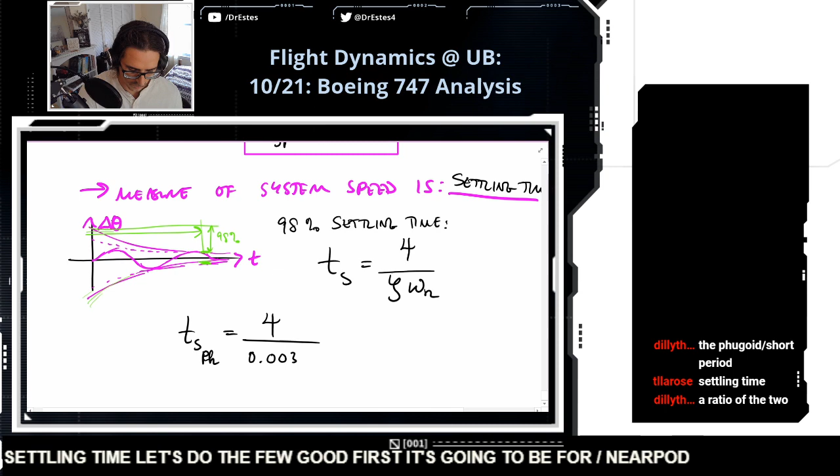Settling time. Let's do the phugoid first. It's going to be 4 divided by 0.003316. And then we're going to have the settling time of the short period, 4 divided by 0.3709.

We'll go to MATLAB once again. So the settling time for the phugoid, 4 divided by 0.003316, that is 1,200 seconds to recover from this perturbation. It's going to oscillate once every 90 seconds over a time duration of 1,200 seconds before it recovers.

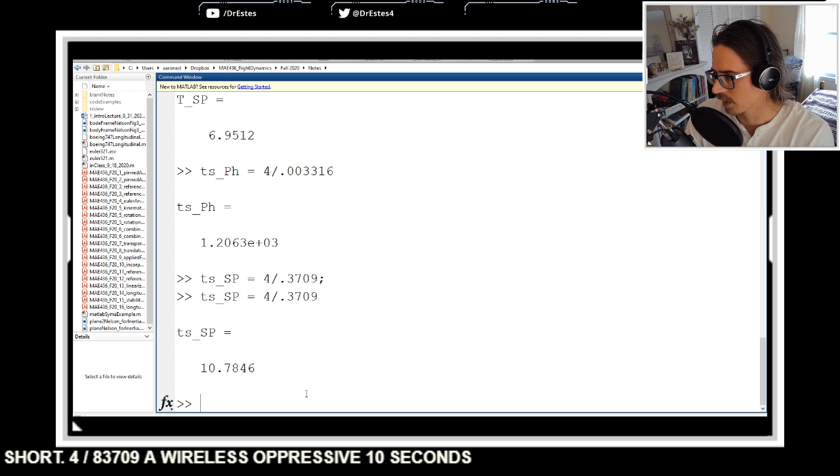What about the short period? 4 divided by 0.3709. Oh, why did I suppress it? 10 seconds. It's 100 times faster to settle. So this one oscillates faster too, it has one cycle every 7 seconds, I guess, and it basically settles out.

Is this independent of perturbation magnitude? Yes, it is.

Well, this is a linearized model, so everything is assuming it's in the neighborhood of our reference flight condition. If it really throws us off our flight path, then it's not valid. But with respect to this model, this is totally independent of the magnitude of the perturbation. A big perturbation, still the same settling time.

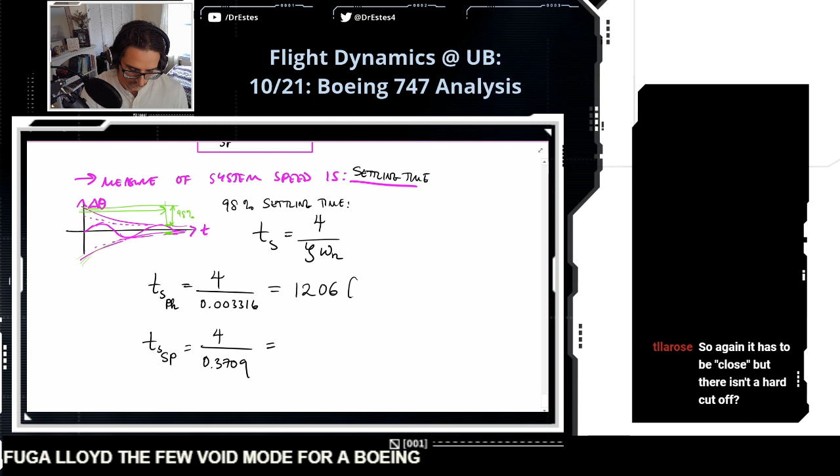Okay, so this one, phugoid. The phugoid mode for a Boeing, 1,200 seconds to settle out, whereas the short period takes like 10.8 seconds.

So again, it has to be close, but there isn't a hard cutoff, similar to the other. Oh no, this is different. This is, well, it's not exactly different. Okay. Assuming we have this linear model, any perturbation magnitude given to this linear model, you're going to get the same settling time for these different modes. Now, in real life, this model isn't valid if you depart from the reference flight condition. And then in that case, it has to be close, but there isn't a hard cutoff, like you said.

I guess I agree with you. But in terms of the math of this linear model, it's going to be the same no matter the perturbation magnitude. Okay. Now, okay, so we have the settling time, we have the oscillation frequency. That's right, Tim. We found the oscillation period.

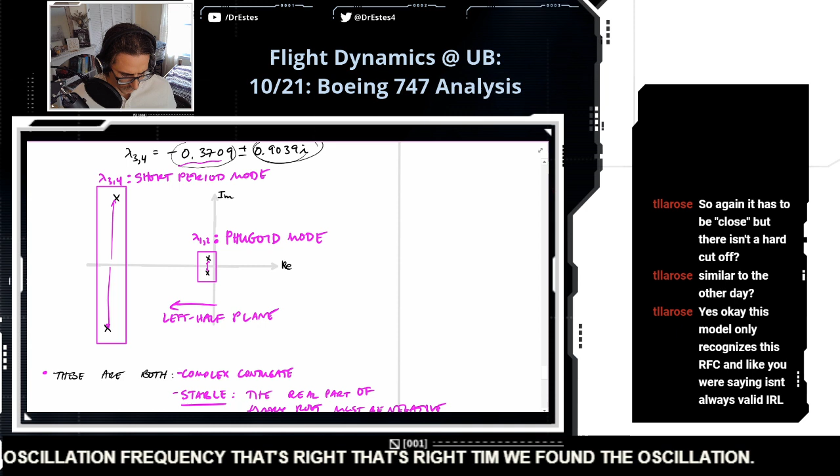So let's go back to this real quick. This is the last thing I'll leave you with today. The complex plane, when you draw the roots, it gives you a good, quick way of interpreting the behavior of a particular set of roots. So the first property that I will show you: the further into the left half plane, so the larger the magnitude of the real part, means faster settling time.

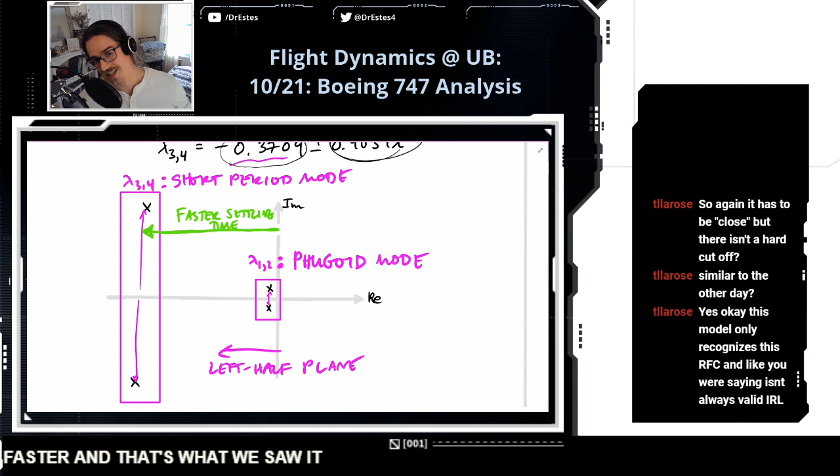The further negative you push a root, the faster it's going to settle. So this short period mode, just the fact that it's farther to the left than the phugoid mode, means it's going to decay faster. And that's what we saw. It decays in like 10 seconds. The phugoid decays in like 1200 seconds because, wow, it's really close to the imaginary axis. So TS is like 10 seconds. Here, settling time is like 1200 seconds. Oh boy.

Now, the other property is the frequency of oscillation. And that has to do with the magnitude of the imaginary part. So it has nothing to do with the real part here. So that's omega d. The higher your root is in the imaginary plane, that indicates faster oscillation frequency, which also means shorter period of oscillation, meaning it takes less time to complete a complete cycle.

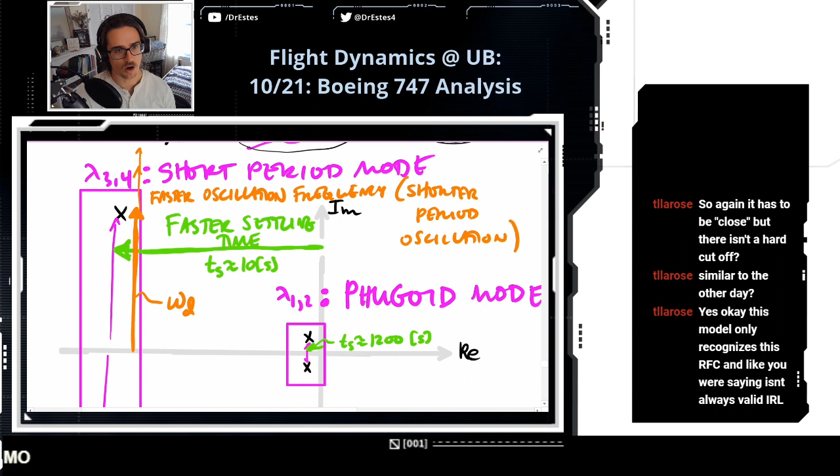So that's what we see here. The short period mode, it's taller in the imaginary plane, and so it has a shorter period of oscillation. So it was 7 seconds to complete one period. But then if you look in here for the phugoid, it's not very tall in the imaginary plane, and the period was 94 seconds.

So that kind of mathematically gives you a description of these different modes.

Do these two modes correlate with two different axes on the vehicle? That's kind of what I wanted to get into next. I don't have the best explanation today, but the phugoid...

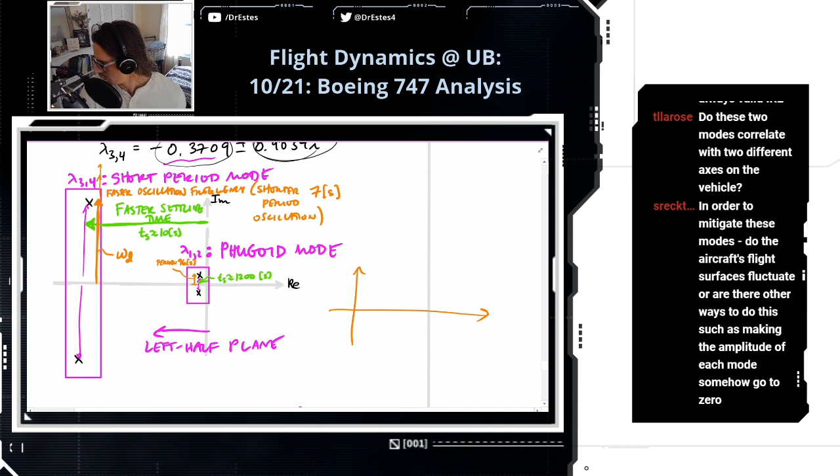Wait, do I have a... okay, beginning of next class, I need to show a video or picture of this. But my understanding of the phugoid is like if you have the aircraft and it's flying this way, if you give it a gust up of wind, it's going to go on this path that kind of looks like this. And this is the phugoid. It takes a really long time to happen. I believe the aircraft is kind of aligned with this path as it goes. I hope I'm not wrong in saying this, but I'll correct myself next time. But when you imagine the phugoid, it's kind of doing something like that.

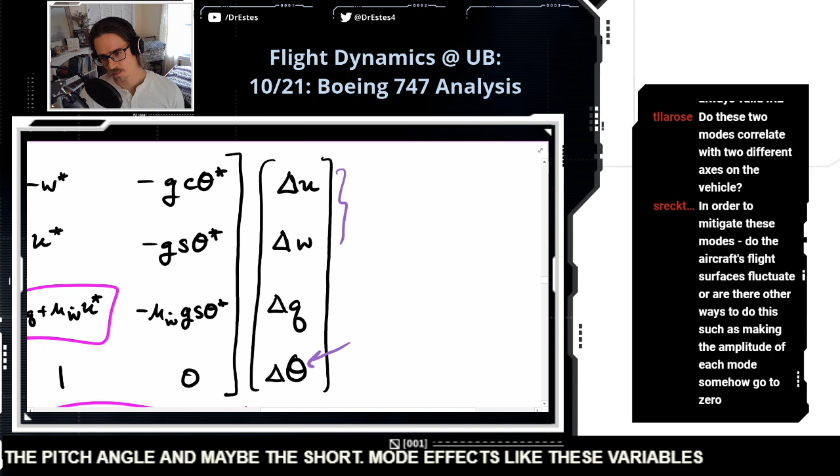The short period mode, I have a poorer understanding of. But they do correlate to different quantities in our... where do we go? It's not so much in terms of axes of the vehicle, but they affect these states in different proportions. I want to say the phugoid affects this variable more, like the pitch angle. And maybe the short period mode affects these other variables. So we'll check this next time to make sure. But it's interesting because it's two distinct motions of the aircraft.

Are you going to show us your death metal? Oh, yeah. Okay, hold on.

I'm going to answer Schrectenwald. Okay, in order to mitigate these modes, do the aircraft's flight surfaces fluctuate, or are there other ways to do this, such as making the amplitude of each mode somehow go to zero? So I think the answer to that is that the flight surfaces fluctuate.

So when we've all flown in a commercial aircraft, or most of us at some point, you don't experience these oscillations so much. And that's because there's some kind of active controller. The control surfaces fluctuate a little bit to dampen out these things.

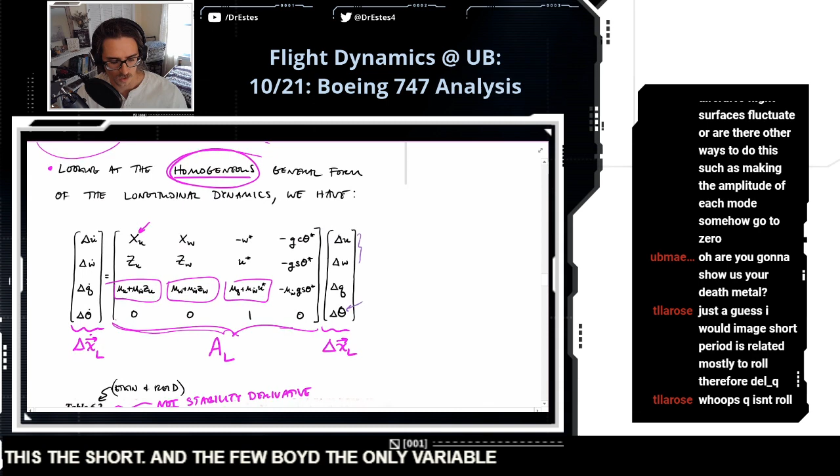It's not going to be roll. Because remember, the short period and the phugoid, the only variables that this model describes are these. Roll is going to be part of what we call lateral dynamics, which we might get to on Friday. I don't think so, actually. So short period and phugoid only pertain to different combinations of these variables.

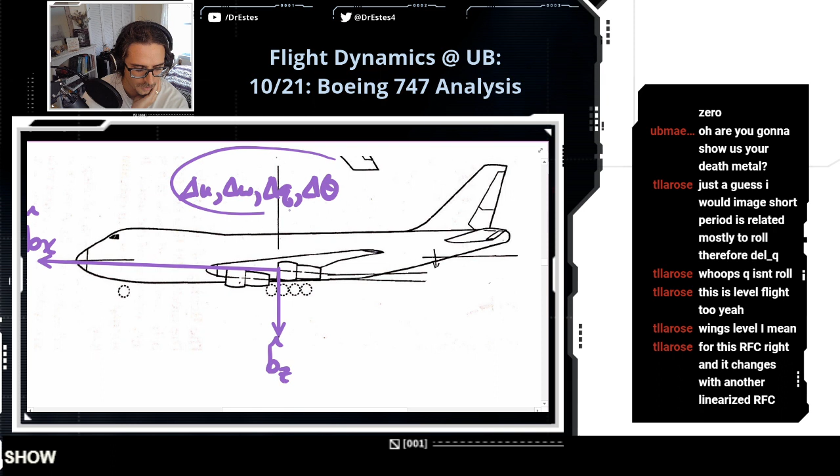What I would love to do is make an animation in MATLAB, but I don't know if I'll have time before Friday. I'd love to bring this drawing into MATLAB and then animate it based on delta U, delta W, delta Q, delta theta, and show how this actually changes the motion.

Okay, Tim's saying, for this reference -- yeah, these dynamics that we're talking about, when people talk about longitudinal flight dynamics, it's corresponding to this specific reference flight condition. If you pick a different reference flight condition, say you're doing a coordinated turn, it's going to bring in a different set of variables when you linearize about that. You can define a different set of modes that can happen to the aircraft about that reference flight condition. So there's other modes like the Dutch roll, the spiral mode, and these come about for a different reference flight condition, which we call lateral flight dynamics.

Okay, we gotta dig up some old Estes death metal. Oh my god, you're not prepared though. I don't think you're prepared for it. See if I can find this.

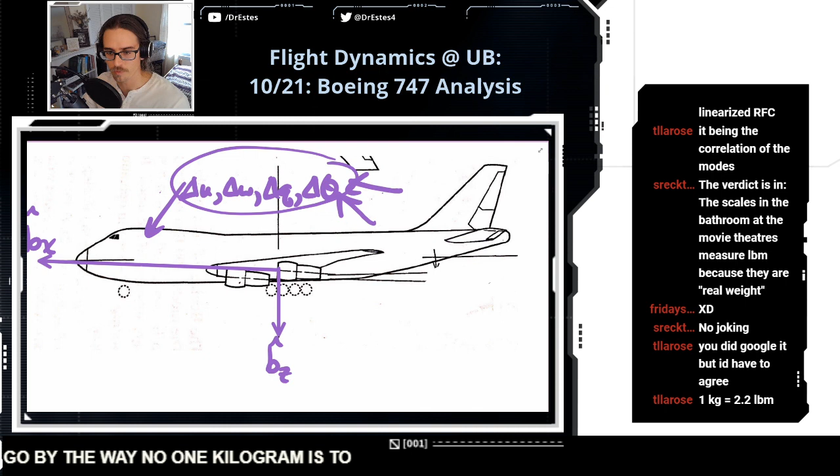The verdict is in: the scales in the bathroom at the movie theaters measure pounds. Wait, are you sure about that? I think a scale gives you pound force. No joking? Wait, are you talking about just the scale at the movie theater, or just like your typical scale? Are you guys turning against me? No, wait. No, 1 kilogram is 2.2 pound force. Wait, is that the same thing as 2.2 pound mass? Now I'm getting confused because of you.

Okay, we gotta look at this. Guys, I think it's pound force. What are you talking about? Like the weight of a kilogram is 2.2 pound force. Wait, okay, kilogram to pound mass. Hold on though, come on. I don't want the history, I want the -- well, never mind. It says pound. Maybe you're a liar. You could be lying to me. I think it's because if I do pound force, watch, it's gonna do this. It's in the first paragraph.